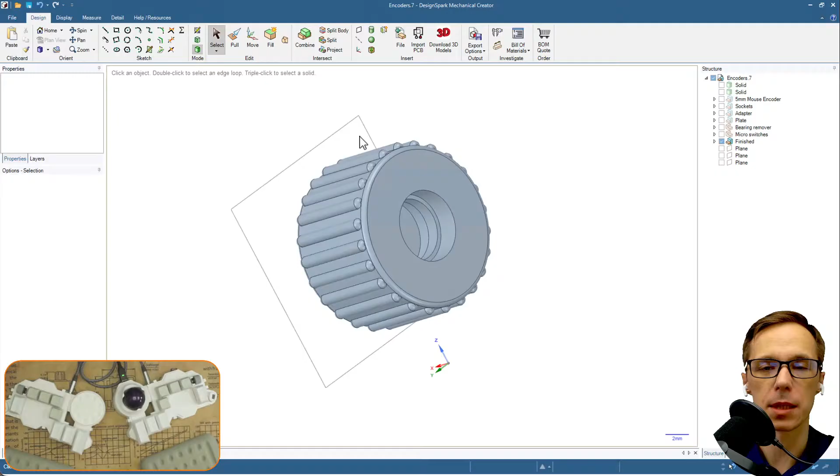I would like to take one more look at the USB-C sockets that we just put down recently, maybe there's a better way to attach it. Maybe we can get a mini jack somehow there, because as I said, I would rather have mini jack than USB-C, mainly because mini jacks, or TRRS cables, or TRS cables, I think they're easier to buy in lengths like 30 cm or something like that. But on top of that, they are more flexible than USB-C, so I would rather have that. But yeah, as I said, it's gonna be difficult to print the top plate. But then I had one more idea how to maybe figure that out, because what is actually limiting us in printing this - give me a sec, let's go back to our project.

So many versions already. So far the only thing getting in the way is this, our infrared. But I was thinking, what would happen if we make these detachable, something like we have with our MEH encoder, MEH01. Because I was looking at it - where is the top, okay, infrared, right. It might be possible to make something like a cutout over here, and then a tiny piece sticking out on it, so we can just clip them in, and this way we still will be able to print the top plate facing down. And that might be nice too, because if you print it facing down, usually the texture is a little bit nicer than the finish you get from the printer. You'd have to maybe do some ironing to get a good top surface, but if you print it face down, usually it's better.

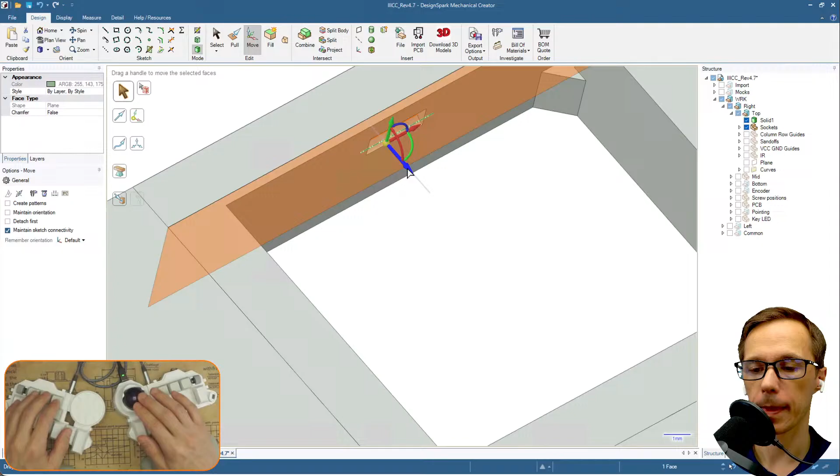Something like this, cut out like this. Oh, okay, good that I looked over here, because if we'd left it like that, it wouldn't fit, because there's a wall over there which I was too lazy to move. We can fix it right now, just a tiny bit. Oh no, nothing moved, okay, that's odd. Oh, come on. Okay, I get it now. Alright, so we have to remove the whole wall. Ah yes, this way, because the socket is actually all the way till the edge. That's okay. Anything over here? Alright, similar situation, and probably - oh yeah, I see, how could I have missed that? That was close one, and then you print the whole plate and you end up with nothing.

Okay, now we have a crap happening over here. Okay, can we fix it already? Somehow, okay, without breaking the whole model. Oh, come on, move. Okay, let's fill this one. Okay, I can't do that, so maybe... okay, that's gonna be tricky.

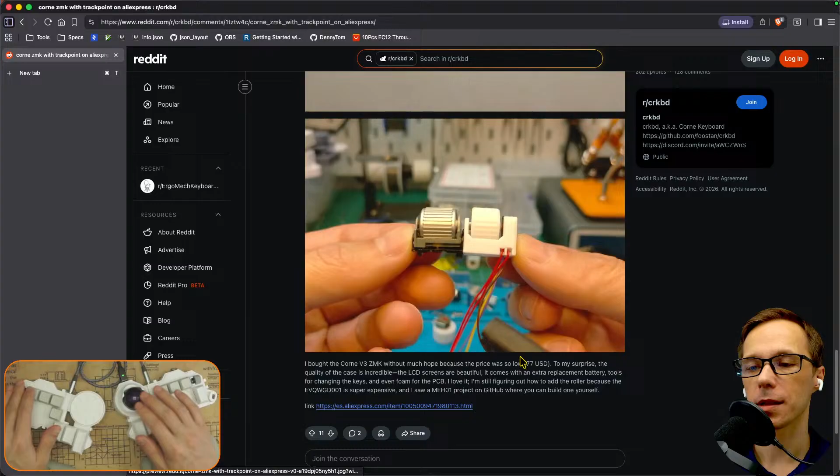I wanted to do something completely different, because today I've noticed, while browsing Reddit, I think it was on ErgoMech, let's take a look over here. Okay, let's do a new one. Someone was posting - yeah, this one, that's the article. As I was looking at that, really nice corne, cool, everything is cool. And then I saw this one, which is a photo from my GitHub, and apparently this person is trying to incorporate my encoder inside this corne. But the issue is I haven't made a proper adapter for it, I only have one that kind of fits my own footprint. But over here, as you can see, the footprint is a little bit different, it's like what originally was on this encoder. And if you'll be able to tell, those wires kind of get in the way.

Yeah, so that was a very weird design. I haven't done anything to make it fit, which is a little bit unfortunate. So that's what we're gonna try to do today. The first thing, I hope it won't take too long, as everything shouldn't take long, like 3 streams.

But yeah, as you can see, I really wanted to do it first, but now I have to go and fix this socket. Oh my god, why is it so messed up?

Alrighty. So I can't move this one. The socket is all the way here. Okay, I think I know what would happen if I take the top plate and cut just the socket.

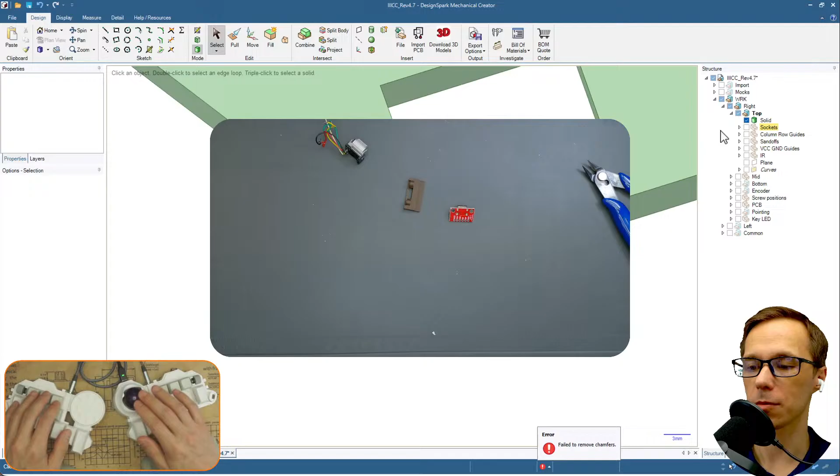Okay, that is not an issue because we're gonna be printing with the socket anyway. Yeah, perfect. Okay, save, so I don't lose it again.

Just like last time. How about this one? Okay, this one is okay. Just to be sure, let's do a quick check on the left side while we are still at it. Okay, top. Okay, I have everything here, maybe even more than I need. I don't need all this stuff.

Okay, there's no encoder here. I forgot. Okay, so we're gonna leave it for now. We'll come back. We're gonna try changing this infrared to make it clip in. I have the printer ready, so we can print in the meantime. I forgot to hide the view. So yeah, we're gonna fix that.

But first things first, let's try to do something with this encoder. So we have an adapter over here.

Okay, what is that? I have absolutely no idea. Where is it even coming from? Locate in structure, where is it? Okay, over here, it's part of the footprint. Oh, that's odd, what kind of...

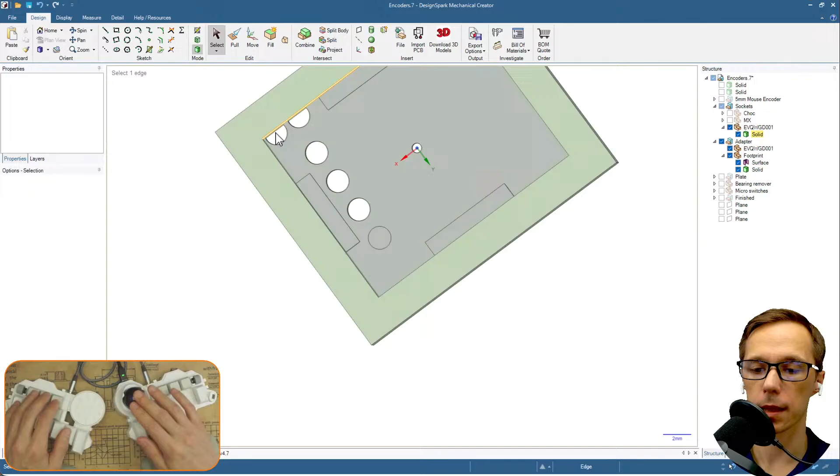I wonder if I have the original socket somewhere. Oh yes, over here. Okay, so that's the original one. Alright, so I still have the same layout for the pins. That is great, so that shouldn't be an issue to connect.

Okay, and I have cutouts over here, but the question is... Okay, that's not the full thing. I think I have one more project somewhere that is like a good representation of that.

I mean, I think I had this full encoder model somewhere. Okay, it's not here.

Switches. So that's one. Yeah, I was pretty much sure I have it somewhere. But I'm sure I have this, yeah, maybe, damn it.

Okay, because this is not the correct socket. But I had a footprint somewhere. Yeah, we are missing the cutout. So that's not the full thing. Oh boy.

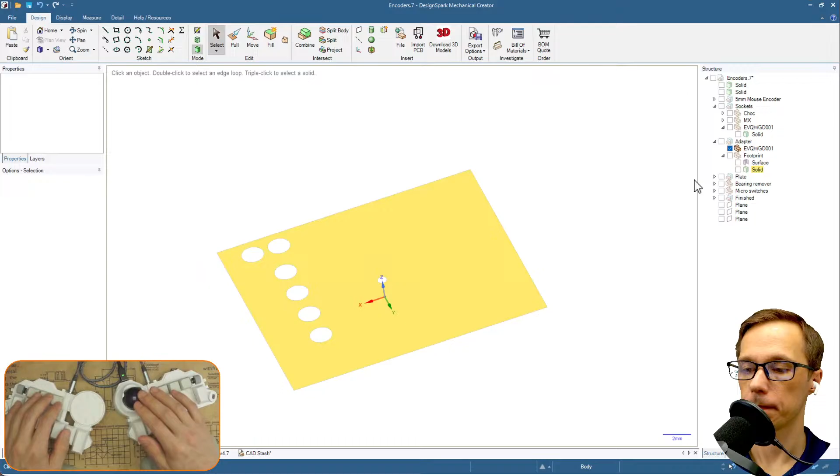If we go back over here, okay, so this is my socket for the PCB, but something is missing over here. Okay, that looks odd. Yeah, these were supposed to be hooks, but they are not. Interesting.

Okay, let's take a look over here, because I think... come on, show up. Let's take a look. Oh yeah, okay. There are hooks over here, but I'm missing them, and I think I know what's wrong.

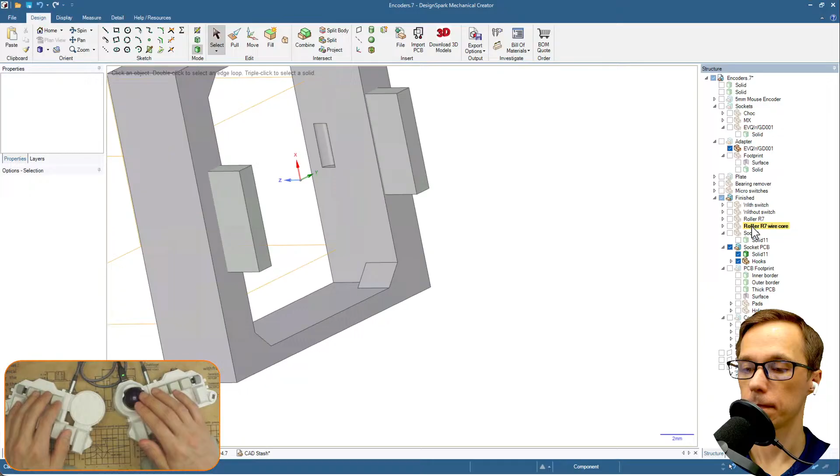And there's one part missing here. Where the hell did it go? Yeah, it's nowhere to be found. Maybe I opened the wrong one?

Okay, it's number 7, so it's the newest one. Okay, I think they're over here, these two. How did they get there? I have absolutely no idea. But I hope that was the one.

Yes, correct, right, perfect. Okay, so this is how my socket looks like, and I have a footprint for it and everything. But what we are missing is a footprint that would fit this encoder, the original one, that was actually meant to replace.

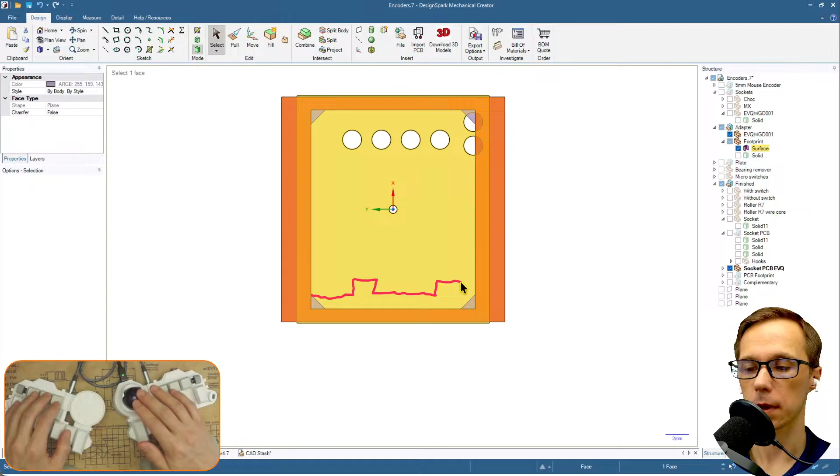So we have to model something over here, because the bottom part looks more or less like this. It goes like this, something over here, something over here. So that's the mounting mechanism. It's kind of weird, to be honest. I think it was meant to be sliding to the side, because the depth here was 1.6. Basically, this is what we have - thickness of a PCB.

Okay, 2 millimeters, and I have no idea how thick this one is. It's either 1.4 or 1.6. Difficult to measure.

So I think what we would like to do... okay, I think the light is going crazy on my face. What is happening today? As usual, it's never okay.

I think we can do it. Okay, so that is the top. So from the bottom, I'm thinking we could maybe go like this, print a leg over here, and something like this, two pieces like that. So they would kind of clip in over there.

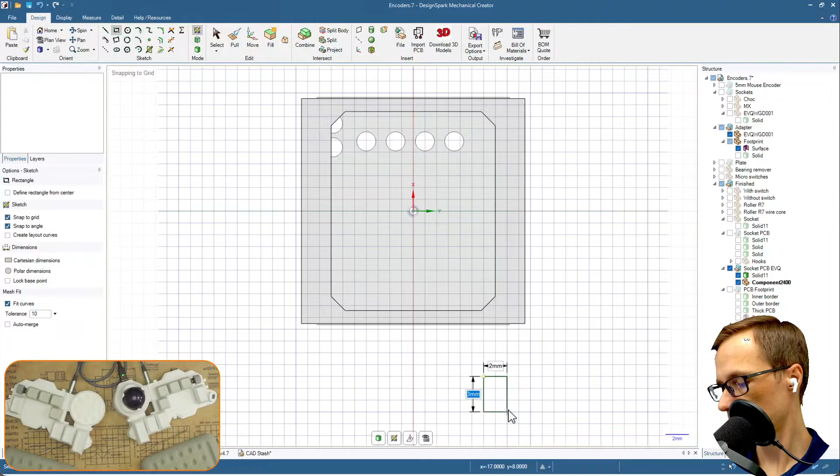Yes, we have to make a new model. Okay, let's do a rectangle. So it's gonna be 2 by 0.3. Okay, 2.3. No, that one was supposed to be 2.

So the distance over here needs to be 5. Basically, we can add this to the footprint maybe.

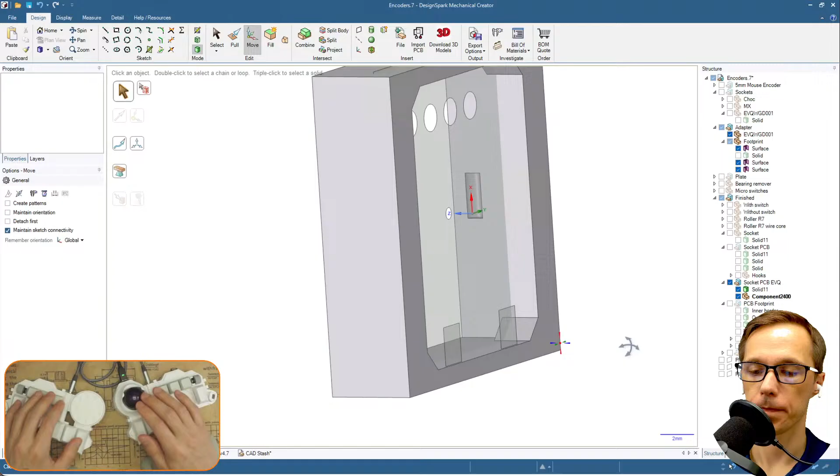Yeah, it would have been much easier if I had this PCB with me, then I could see it. There is 1.3 over here.

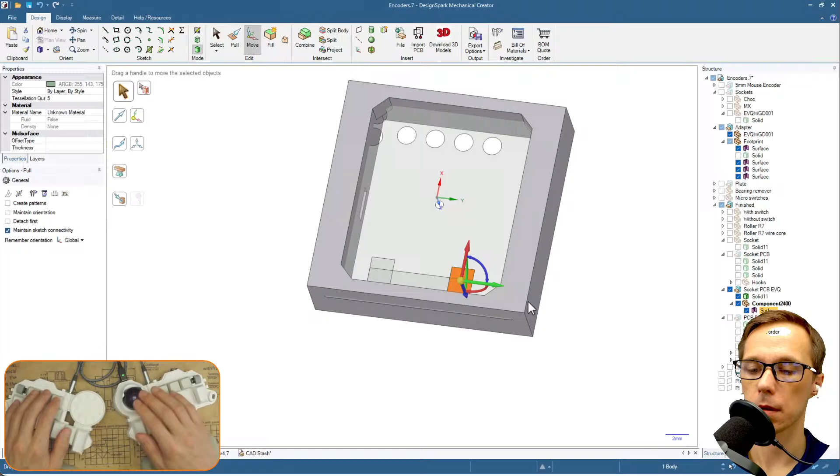Copy this and paste. It's a little bit too big. I would say maybe, I don't know, let's do 1.8 for now. Well, that is not that much.

Okay, give me a second, guys. Okay, so we have to attach this part somehow to the edge.

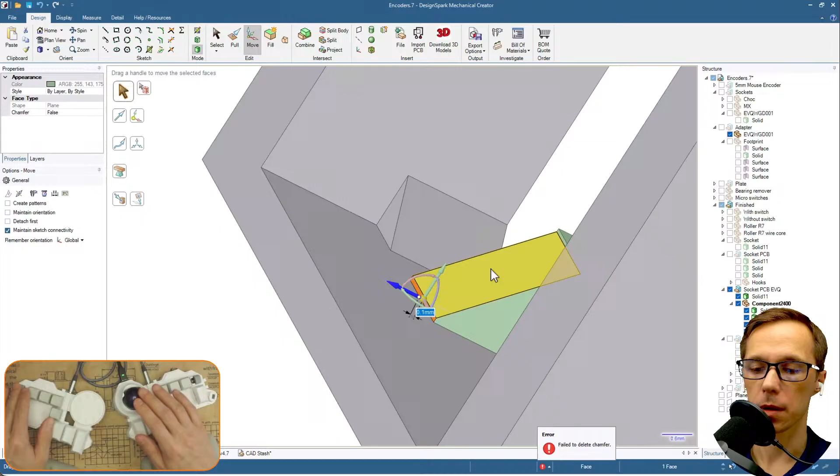Okay, so this one we can print it on this side. There's no problem, these parts will print okay. This is so tiny that we don't need a support or anything like that.

And we're gonna be needing it to print like this. Okay, so supposedly this should fit into this. Okay, maybe I think I made a tiny mistake.

Maybe we should make it a little bit smaller, like 0.1 smaller on each side.

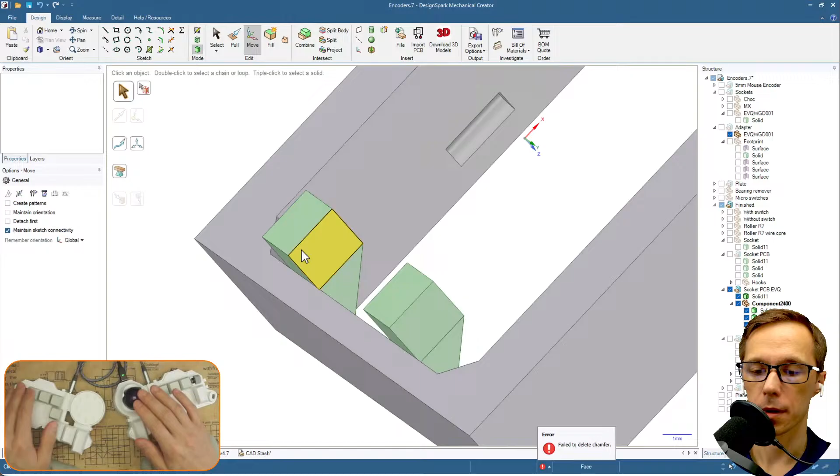I hope it will hold. Okay, on this side maybe as well, minus 0.1.

Okay, what is the standard PCB thickness? I think it's 1.6, right? JLC PCB.

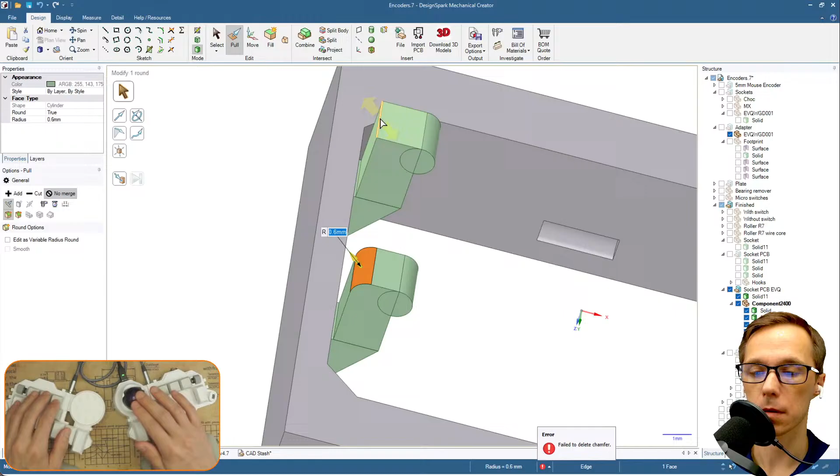Maybe we can make this, how about like a round edge, maybe 0.6. Would that do anything? Okay, like so.

Yes, but there is one more thing over there, I forgot. This one. There is a hole over here. And there is this tiny, I don't know what that even is, tiny nipple.

Oh, come on, focus. Too close. Over here on my thumb.

It's 150, but I don't have it anywhere, on my footprint, for example. Yeah, it's not. Okay, that might be problematic. Where is it actually? Okay, it looks like it's on the edge. It should be somewhere over here.

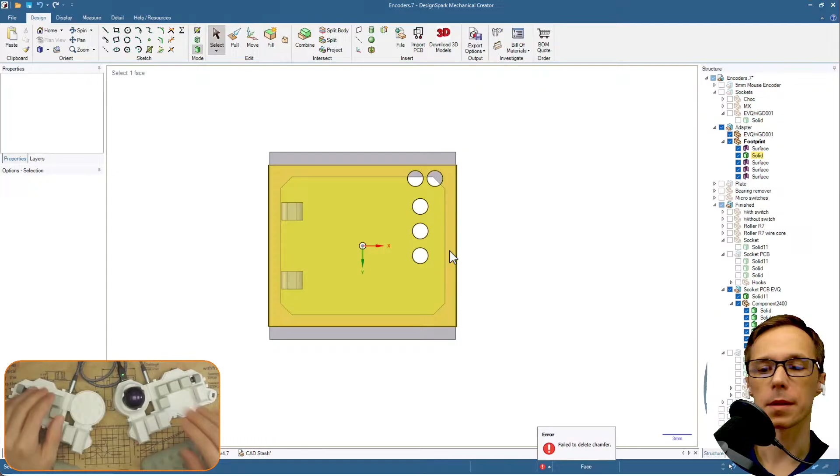And my green screen is breaking up again. Oh my god, what a stream. Am I gonna have at least one stream that everything works, no issues?

What is the size of this thing? 1.5 already. Yes, 1.5. Okay, let's drop it.

Okay, hello, WMW. Okay, how hard would it be to replace TRS jack on a Ferris sweep with that common JST connector for batteries?

Well, I'm not quite familiar with how Ferris is built. You're talking about Ferris sweep, right? But if it's a TRRS, okay, I don't think you can swap the footprint from.

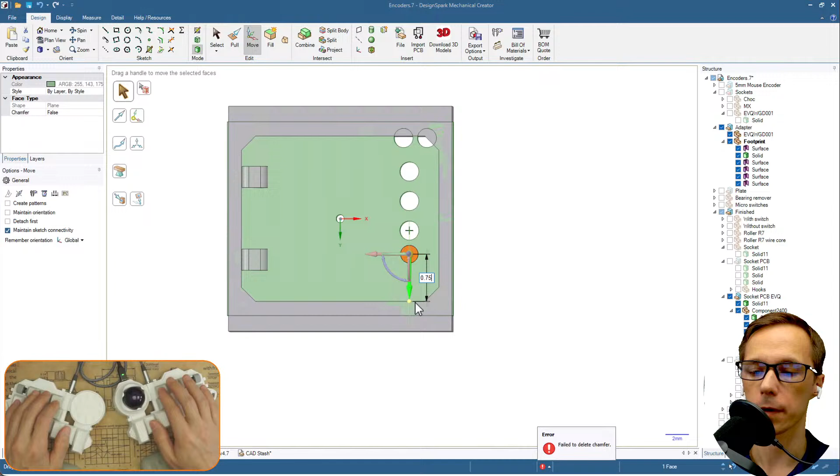Oh, no worries, this flow is always a mess, so no worries about that.

Okay, so there's one more hole over here. Okay, do I really need it? Probably not. Yeah, okay, it's not needed. I kind of lost my train of thought, because we don't really need this opening, because all we need is to clip in the socket and that will be it.

And that should work. Okay, I'm gonna print this one, and we can take a look how fragile this part is. I just swapped PLA to PETG, so it should be a little bit more resistant, so maybe it won't break that easily.

I wonder if I really need this bevel over here. Yes, I need it, because otherwise I won't be able to print this thing. Okay, that's fine, let's leave it as is. Anything else I need to add? No, I think that's all.

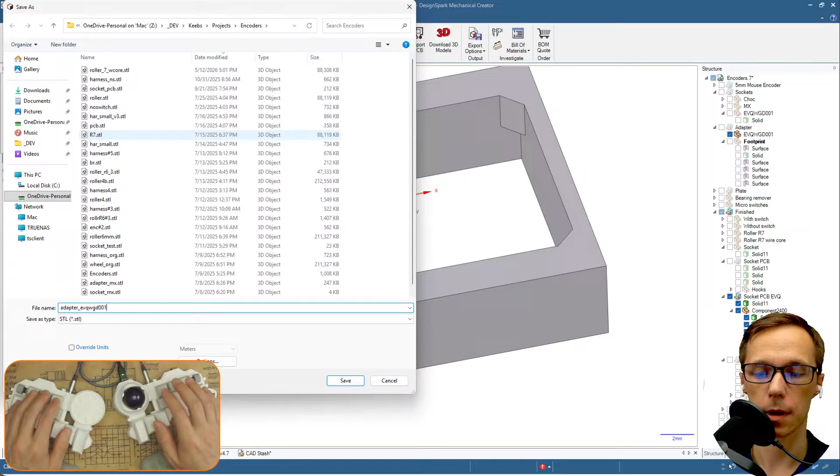No, not PDF, oh my god. STL. Okay, it's gonna be adapter. Okay, I'm gonna... EVQWGD001. Let's give it one more try.

Okay, flip it over, so this should print like this. Okay, something is slowing down. Okay, maybe my Mac is not doing well.

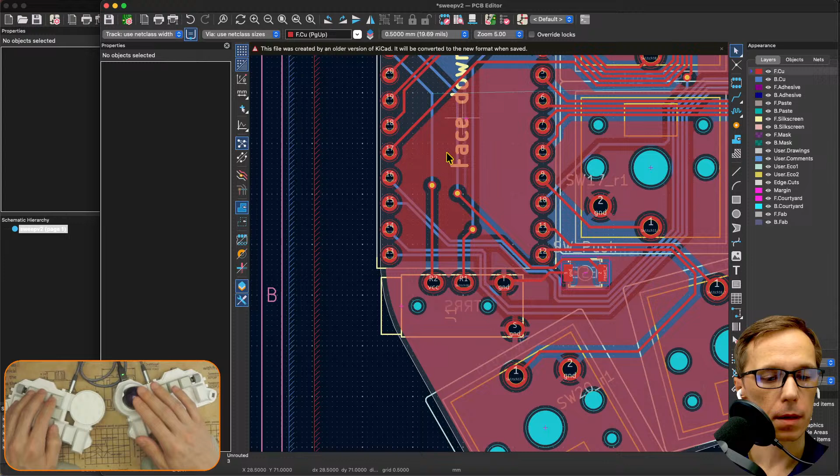Yeah, I think it should be possible. It should be possible to change. Well, yeah, you're right, there is plenty of space over there, so definitely something you can do.

Yeah, that shouldn't be difficult. You just need to remove this jack from the schematic, remove these mounting holes over here instead of mounting holes. Okay, where's delete?

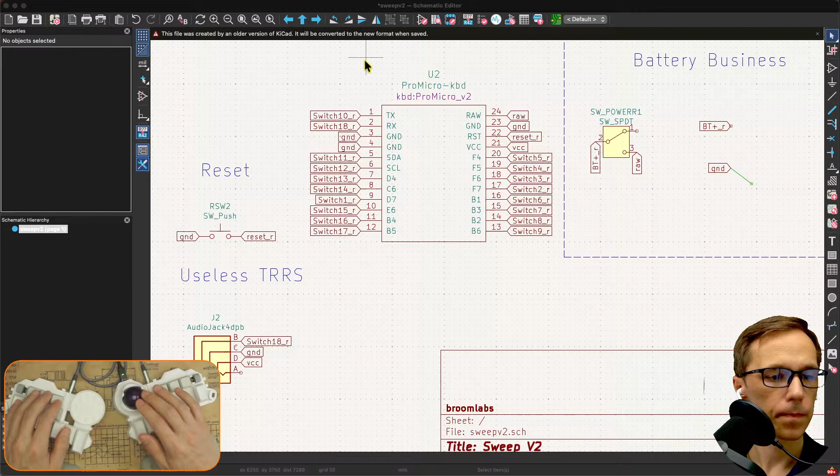I already forgot how to add something. Just gonna... I don't know how to find JST over here. If I even have a footprint, probably not. I don't know if it's by default, because there are different connectors over here.

So yeah, you probably will have to find as well a footprint for this JST. But yeah, looking at it, it should be quite easy to do, as I said, you just remove... yeah, definitely should be easy to do even, I would say, because you just remove this, instead of these holes over here, you're just gonna drop this JST, connect whichever pin you need, update the PCB, and on the PCB you will just have to place it where you have enough space, and that's it.

Looking at it, this one is a little bit different, because on the one that I saw on the store, this push button was over here, but on this one it's here, but that's not a problem.

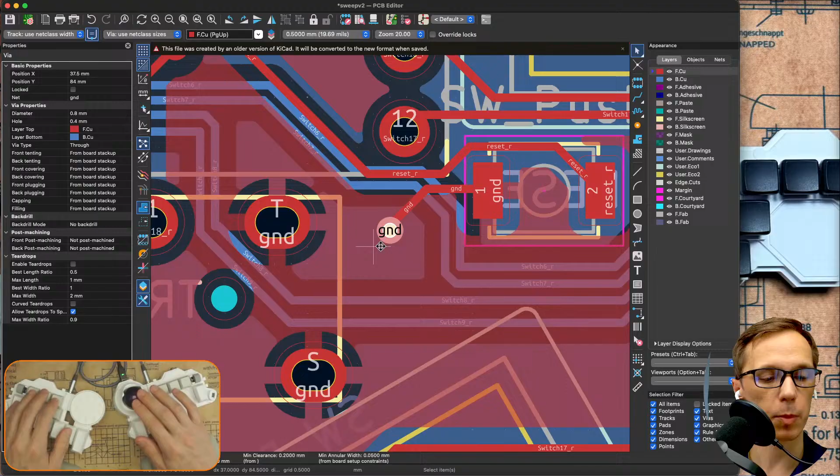Okay, so instead of having it like this, you can just drop a via. Where is the via on this thing? Is this a via? Yes, you just drop it here and you see it's already ground, because the bottom plate is ground, so you have to do it like this.

So basically, the switch, you don't have to move it or remove it or do much with it. You just need to disconnect from here, because you're gonna remove this anyway. It's gonna be something like this, right? You're gonna have a JST over here, and this ground, you just connect, drop a via, and that should be it.

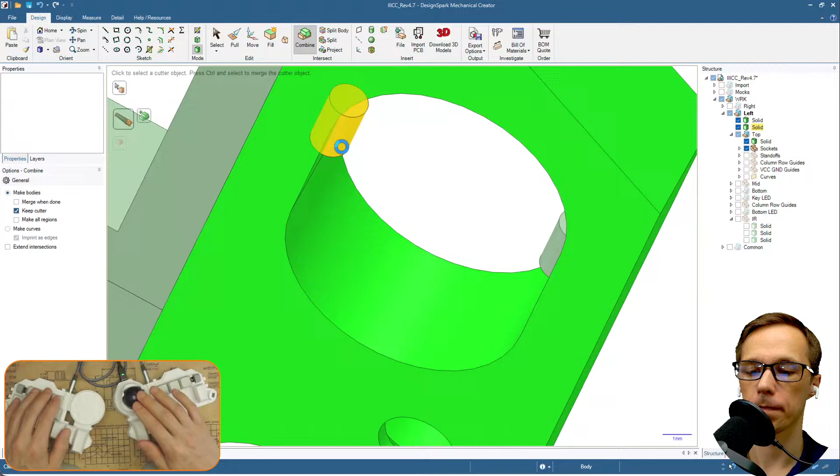Okay, maybe we can try with just one thing first. I mean, I don't have to do both at the same time. Can I now change it to what was that, 0.6? And we can bring back. Okay, what is this part? Okay, it's the other one.

Okay, so that will be our infrared. We're gonna slot it from the top. I think we should maybe make it a little bit smaller. We should leave it, well, we should give it some more space, I assume, this bottom part.

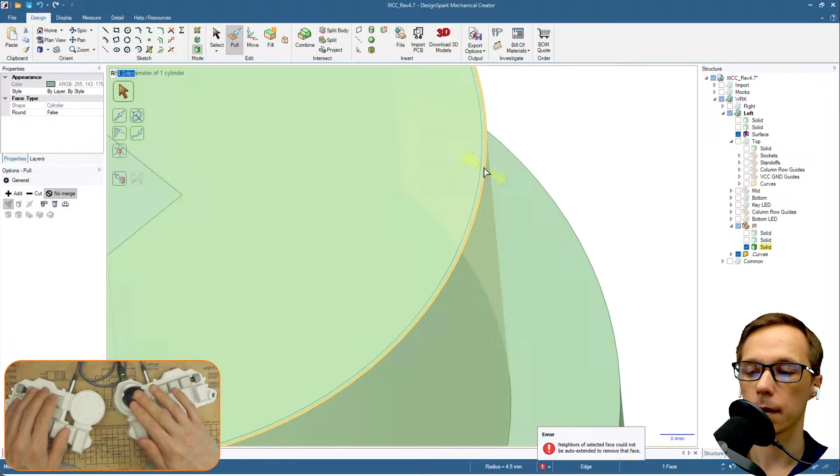Let's do an offset maybe, like 0.005. Okay, not how I wanted it.

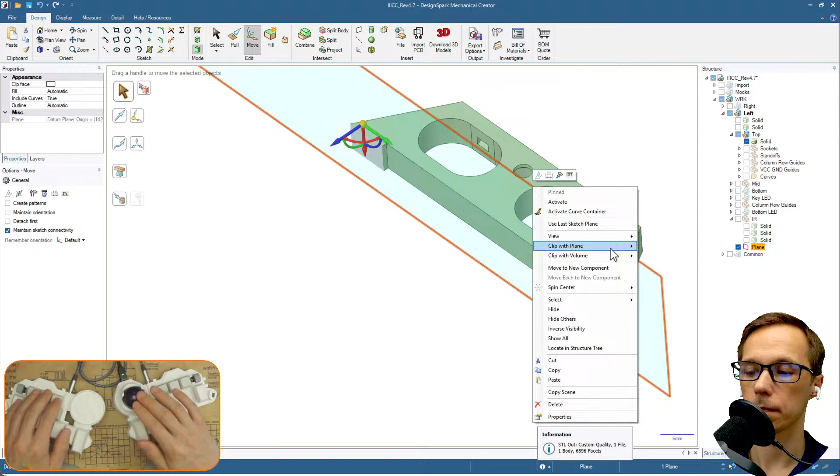Okay, I hope I can clip this with the plane. Can I? Okay, perfect. One more thing, we don't need the whole piece, I am just interested in this part. So let's clip it further. Why is it so long? Okay, I guess half of this part should be okay.

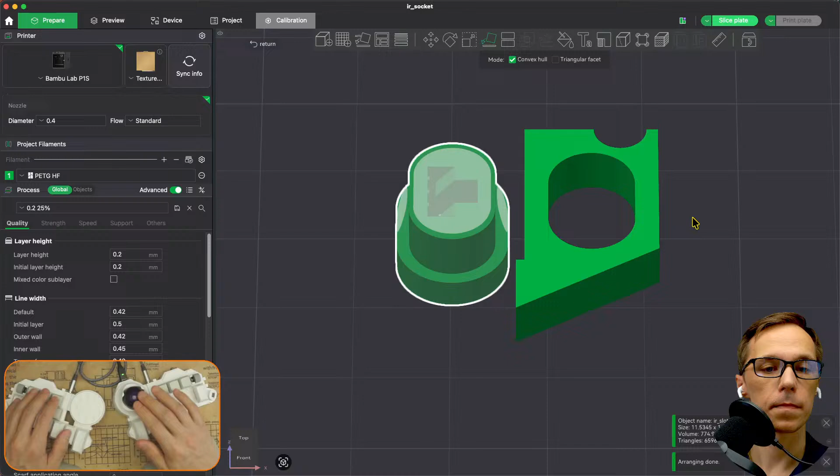I know what happened with this. Why is it so slow now? Okay, the question is how should we print the infrared. Should it be like this, or should it be the other way around? Well, the issue is that this edge might not print that well. Probably it won't.

Okay, it's 1.3 millimeters, so not good, not good. And I'm pretty much sure we're gonna be needing some kind of support over here. This might make fitting the infrared difficult if we do it like this. But we have no choice.

Let's print it and see how it looks. Oh, why is it so slow? My god, it runs terrible. Are there any settings? Never mind. Okay, I need to change the filament. Okay, I will just leave it. Let's do it in PETG. Right, let's go.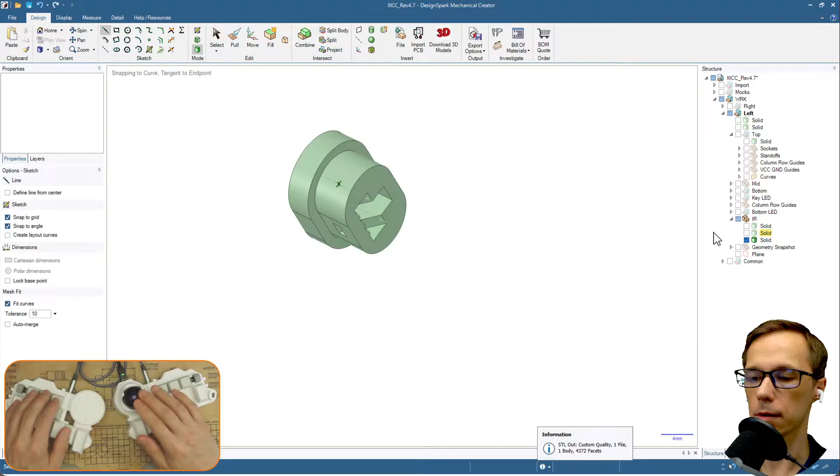Okay, there it goes. Let's take a look, what else do we have over here? This geometry we can get rid of.

Okay, my cutters, I'm gonna leave them for now. Okay, that's the left side. Oh, doesn't matter.

Okay, I wanted to take a look, one more look at our middle plate or mid plate. So this one is like from the bottom.

I was thinking maybe moving this one all the way up so that the socket, the USB-C socket, would be attached to the top plate, but that will be difficult to pull off.

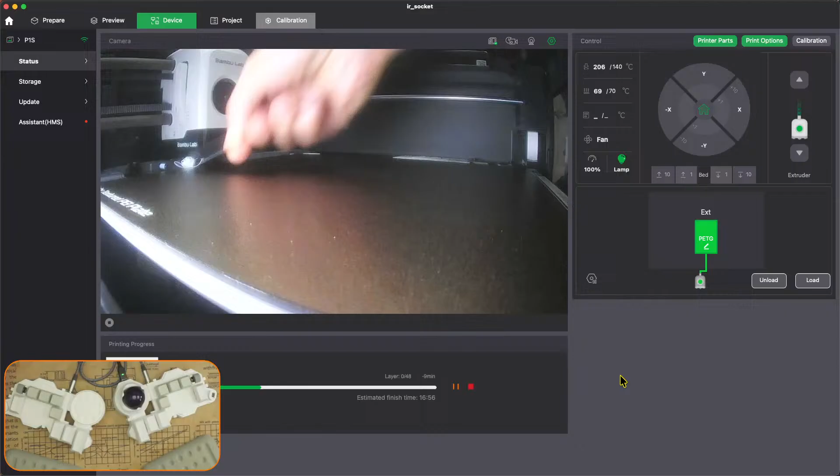Quite often it happens that some part of the plastic gets stuck to it. Instead of going down the chute, it will somehow stay attached to the nozzle.

It looks like it's okay. I don't know what happened with the camera, there is no view. Oh, we have, there's a view. I think that's like the 6th time I'm trying to make it work. Finally it triggered. Alright, so we can admire.

Yeah, I have like all the bottom plate prepared for hand wiring, but some of the stuff is not gonna be used. So this is the opening for the I2C expander.

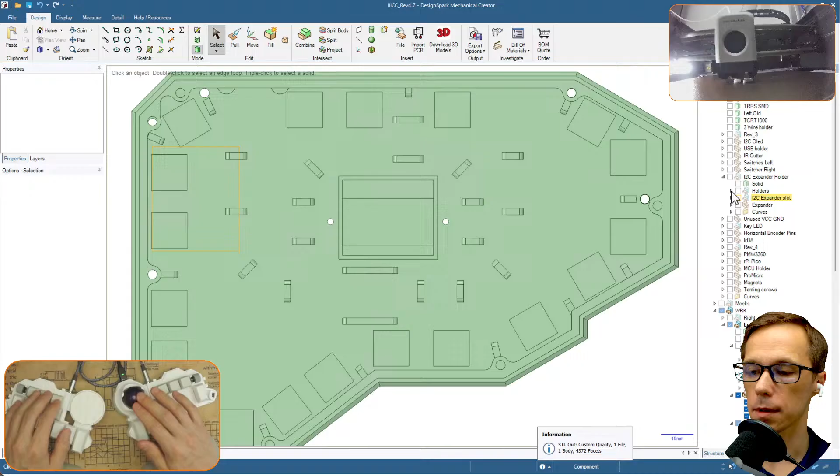Okay, the holder is over here. I even have a slot, quite a lot of things. Left side, yeah, looks like this. Okay, I think we can stay with that.

Then we can basically use even something as small as Arduino Xiao, like the very, very small one, because we don't really need that many connections to it. Like what we need, I guess we only need...

Let's take a look, how does it look like? Seeed Xiao, like this. Oh, it's over here.

What do we have? Okay, SDA, SCL. So we're gonna be needing these two for I2C, and we have like clock.

So these 4. Okay, this one is RX, and TX is here. Okay, this color is SPI, so it's only these 3 for SPI.

So we're gonna be needing one more. So this one we can change to chip select. So that's 4, right? Chip select, master in, master out, clock.

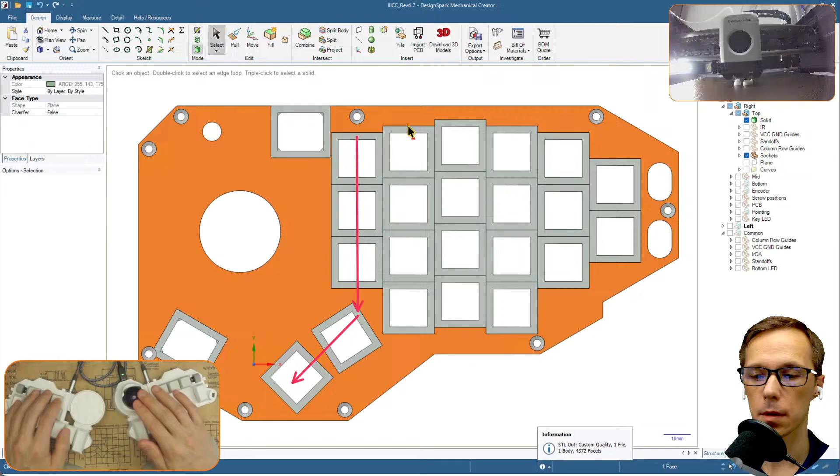Let's do columns first. So that would be one column. Another one over here.

Okay, we need infrared hooked up somehow as well. What else do we have?

Okay, one for the encoder over here, and we have another encoder, so that's 1, 2, 3, 4, 5, 6, 7, 8, 9. But basically we can make it smaller.

Maybe... ah, damn it. For example, let's change color. Let's do rows, so that will be one row.

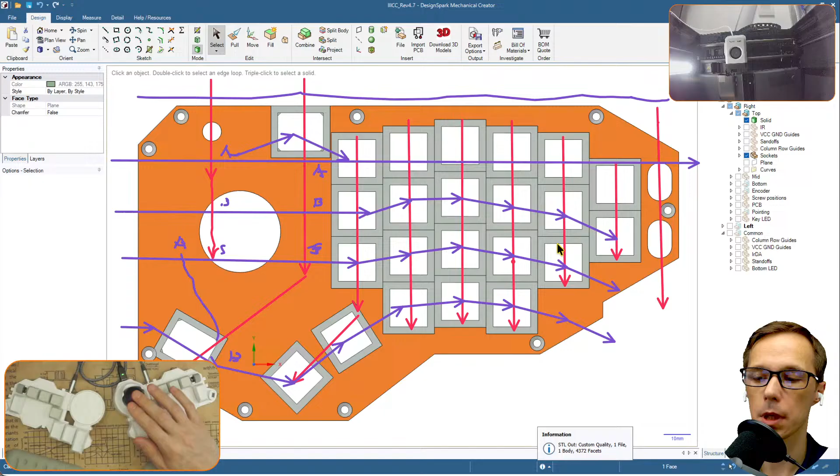This one will also eat too, because there will be A, B, and switch from this one. Yeah, okay, let's leave it like this. So we have 5 rows, and okay, this column over here, we can also kind of get rid of it maybe, and we can use this one. So this column will kind of wrap around and go through here, because we have - this is like one row, second, third and fourth. So these we can route like this. Yeah, so this way we can save on this column. We're gonna use this one, wrap it around. So that will be one.

I'm trying to save this beautiful picture, and I have no idea what is happening. I can't press anything. Oh boy.

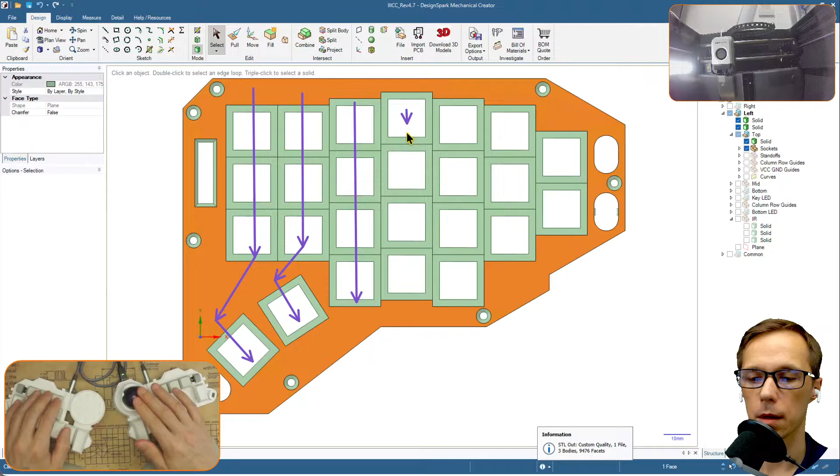Okay, here we have 3. And over here I think we can wrap it like this. We can save some wire maybe.

No, hold on a second. Oh, it's not gonna work. Okay, this one is wrong. Can't be like this. Okay, one more.

And this one has to go all the way to here, right? And this one... Now we have a problem because we have one infrared over here.

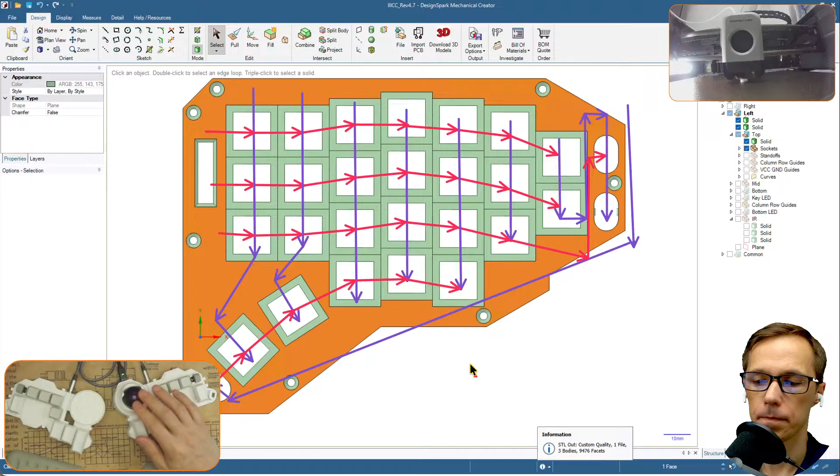Not so good. So we'll have it like this. 1, 2, and this column will go all the way. On one hand it would be nice because we would have one column just for the infrared. Good separation. We don't have an encoder over here or anything like that. So it's, I guess, okay.

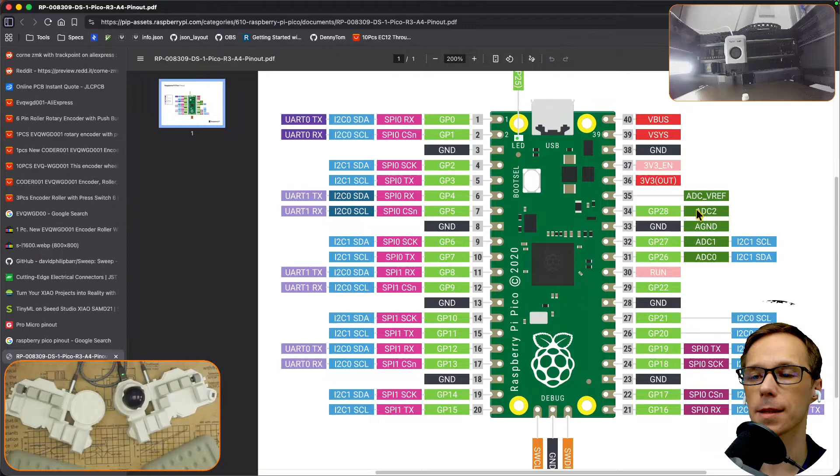How many do we have over here? 1, 2, 3, 4, 5, 6, 10, 14, 16, oh my god, 18, 22, 3, 4, 5, 6, wow, 26. Oh, that's plenty. So we can have our SPI, we can have I2C, we can have everything on this one.

Do we have space for that? Let's just take a look. I wonder if I have a Pico over here. Oh, okay, there is. Oh wow, looks like it was planned like that at some point. So it kind of fits. Or maybe not so much, because...

Okay, we're not gonna be using an I2C expander then. Oh.

Okay, so it's not that bad, but the problem is that it's basically covering 2 keys, almost 2.5. Or technically 2.5 switches will be covered by it. And if I would like to have diodes over here on the bottom, if I would like to have a per key RGB, then this will give us some issues.

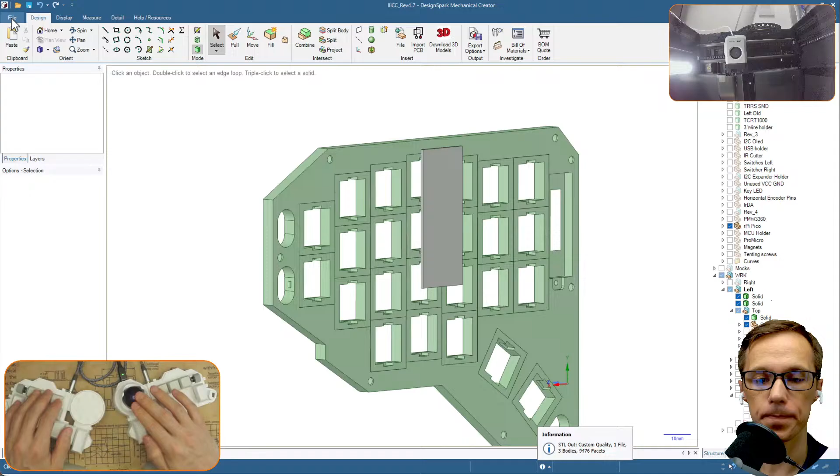And the Xiao would be much smaller. And do I have it over here as well? Nope. But we can import it quickly. Yeah, there it is.

No, it's less than half. Well, it will still cover one switch, so not ideal. But what we can do, we can maybe... For this one we could move it maybe... Yeah, but with this one we still need to use an I2C expander, and then it's still gonna be not enough space on the bottom.

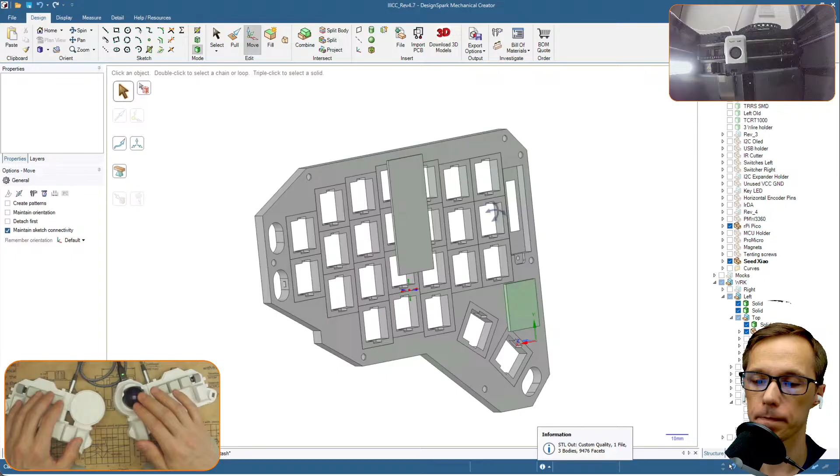Okay, one more thing that we can do, maybe we can bury it under the bottom plate. So if we had bottom...

It's 2.4. Well, basically we could move it all the way, for example, from the bottom could be 0.6. That is enough.

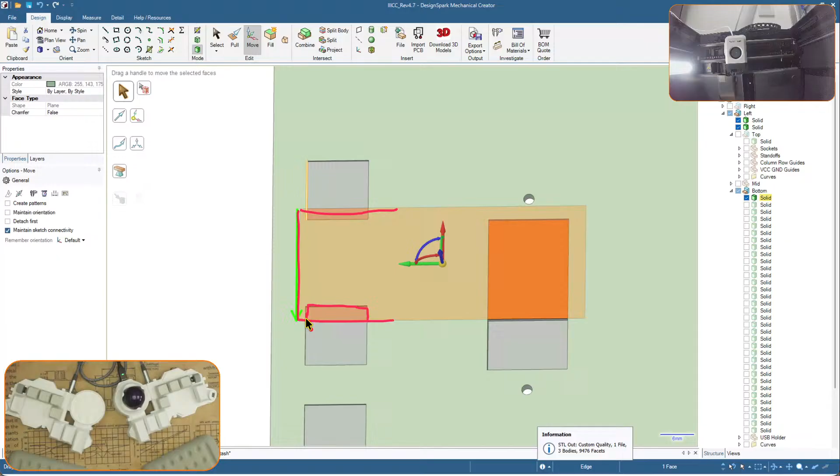I'm gonna go and pick up the stuff that just finished printing, and I need a few more minutes because I think I have diodes somewhere over there as well, so we can take a look at the diodes as well.

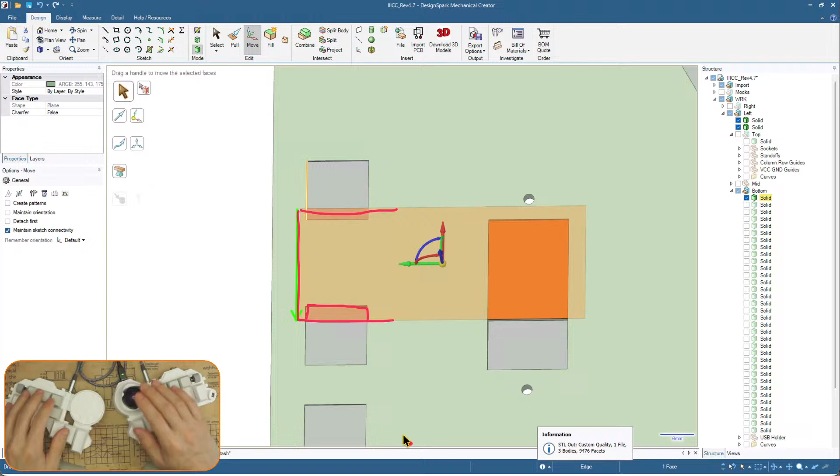What is the size of this thing? 10 by... okay, almost like 10.5 by 10.5. Alrighty, I guess it would seem like I have these. Yes, 11 by 11, so I put them everywhere.

I was also working at some point on this thing. Okay, let's put up. Because in terms of per key RGB or like per key lighting, I came up with this idea that we can do something. Okay, 1, 2, there should be more of these.

Maybe I didn't finish this side. But there should be a key LED. Yeah, something like this. So the idea was that...

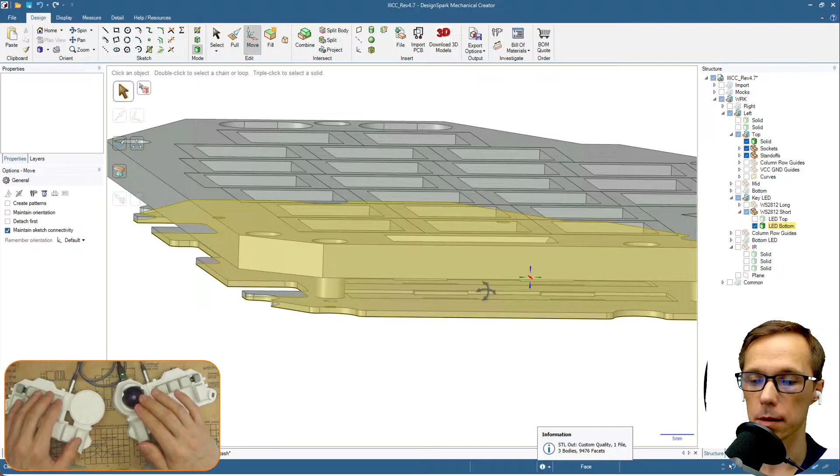I think I had a few columns over here already, but standoffs, is that it? Yeah, so I have a standoff here. Well, for some reason this one is a little bit lower than it should be. Yeah, but it would be something like this.

Okay, let's take a look at the bottom plate, because I am curious. Well, I think at some point I had it nailed down that there was enough space for everything. Yeah, exactly.

And I can still lift it up a little bit. I don't know why I put it like this. Okay, so maybe that is not such a bad idea. Instead of trying to put all the diodes on the bottom and having issue fitting everything together, we can do it like this. And I think it would be better if we... Yeah, difficult choice.

If I want to stick to I2C expander, because it's easier to program, it would be also very easy to swap later on if I would like to have a wireless version. It's just one MCU and just add battery and that's it, problem solved. And if we do it like for two, okay. Alright, I forgot that we can't have it like this because there's not enough space. I mean, we have not enough pins.

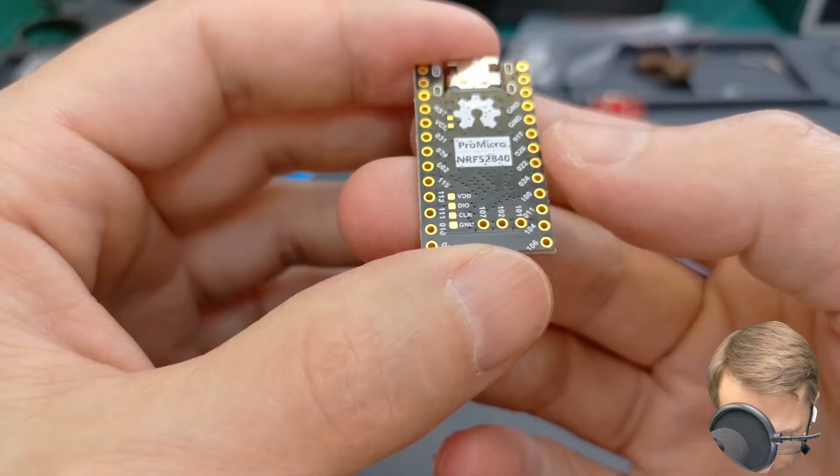How many pins? Okay, 1, 2. Yeah, I wonder if I have access to this as well. No way, this one is still 16, all of them. So it's the same pinout, just these 3 extra. That will give us 19. It's not even the same size as Pro Micro. This one is smaller.

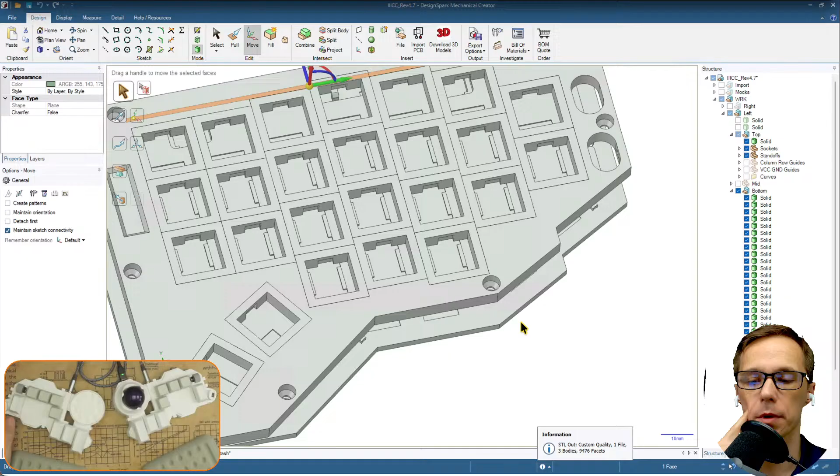Well, having 2 MCUs would be cool because then I could change and I could use 2 Arduinos, for example, because they are small. It would be easy to fit them in, and then I could have different color for keys. We can go with this plate and different color for underglow, so that would be this part.

Okay, but what we need to fix? We need to fix this diode, right? Because we just tested, looks kind of promising. And the issue is that I think this is too big. What is that? 0.6.

Let's go back over here. Okay, we did 0.5, look, that's not much difference, to be honest. I wonder if I'll be able to push it out. Probably not. Oh no, it came out. No way.

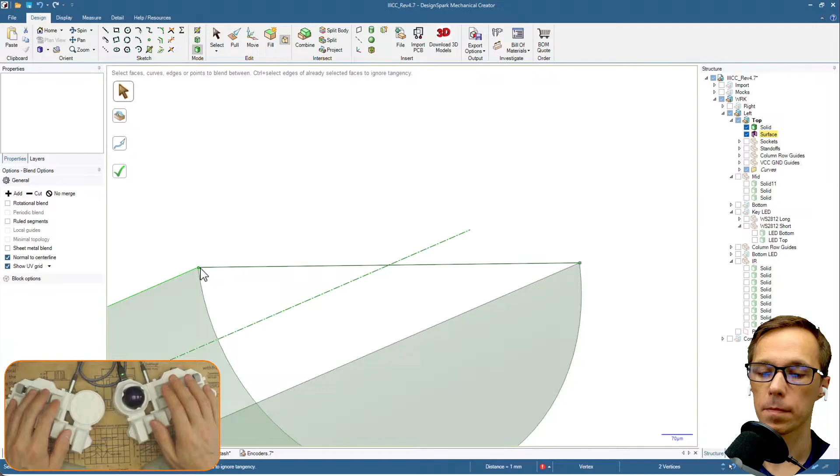Now I should be able to fill this. And this is how you can quickly build something just by using edges, you can blend them together. And then you end up with... probably it would be faster to just make a cylinder, maybe.

Okay, let's change this, it was supposed to be, okay, it's 0.5. 0.5 over here. We just have to cut.

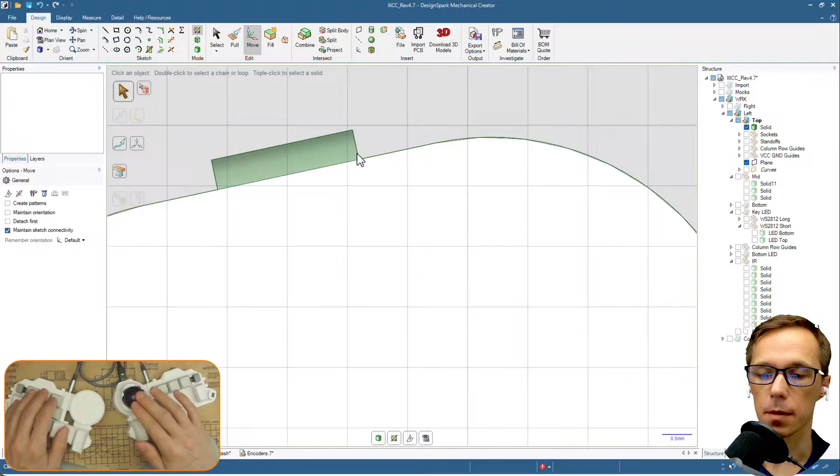Okay, looks like we are done. One more thing I would like to check is that if they are all on the same level, I can do that quickly just by dropping a plane and moving it to the midpoint over here, and then I can just try to draw. Yeah, they all look okay. Perfect.

Yeah, but that was what? Just the left side.

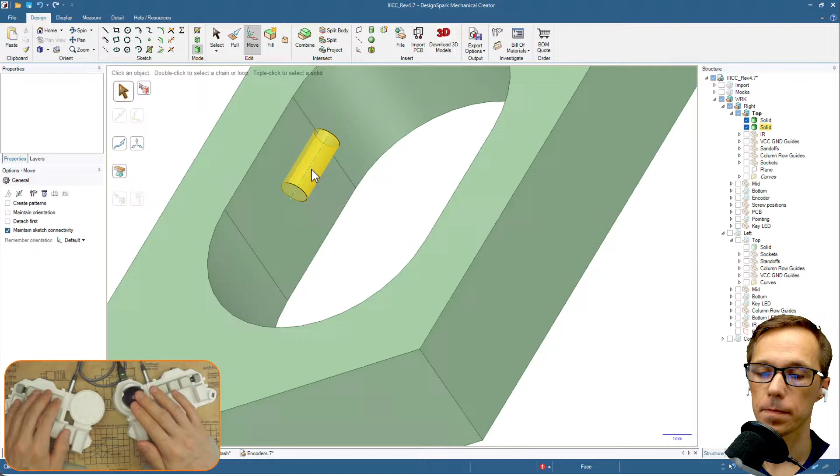A little less work on this side because we have only two diodes, two sensors.

And what we can do, okay, I still forgot I need to make it a little bit smaller. Okay, let's do it like this. Let's remove them, let's go back to the left side, because over there we have almost everything done.

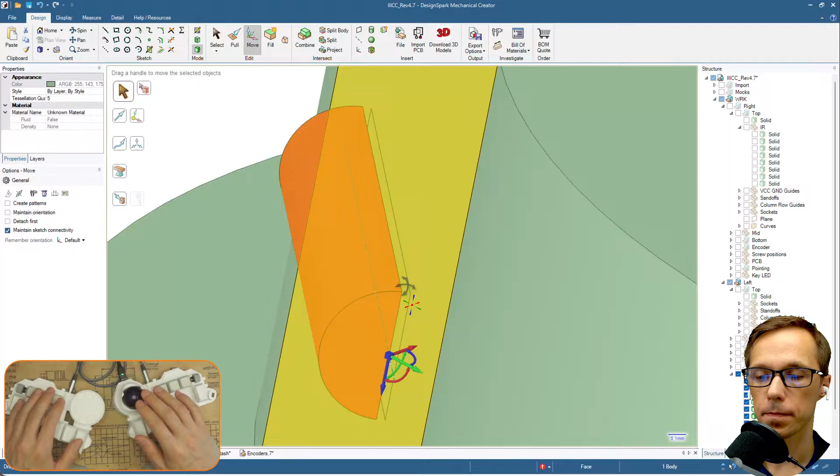Perfect. Okay, it should be good right now. What's this oddity here? All right. Always something.

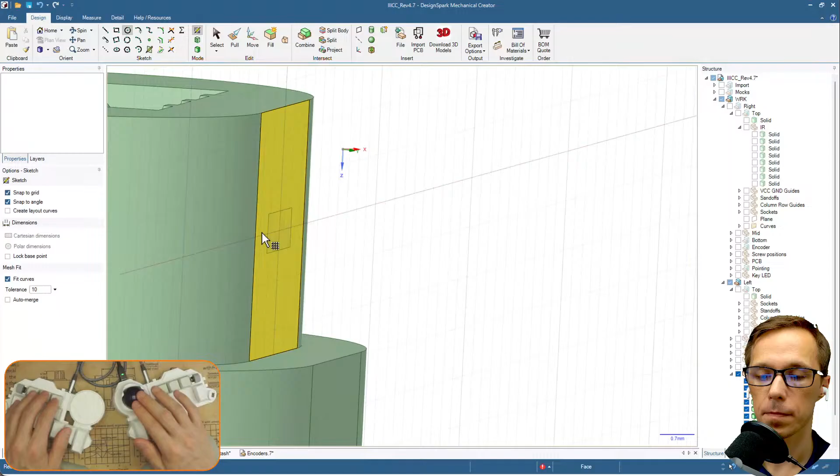Wait, I think I've made a mistake because this one will be smaller right now. I basically chopped off a little bit where I shouldn't. And we have to redo almost everything. That is odd.

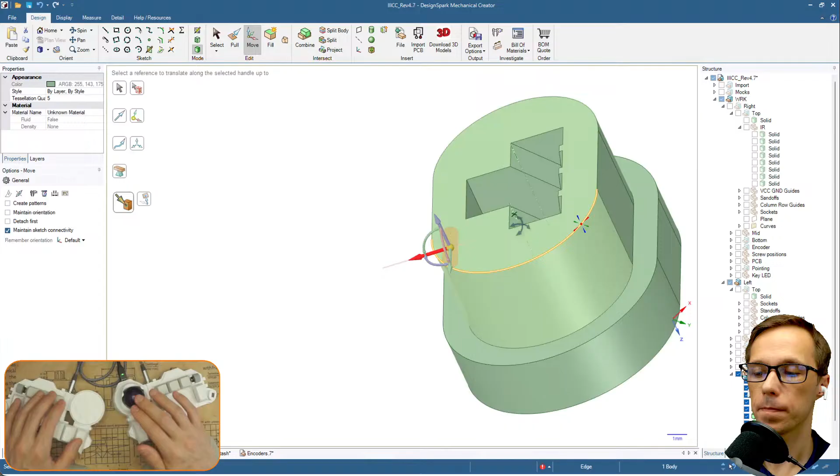Okay, finally, I think all of them should be okay right now. We have some margin over here, not much, but should be enough. Yeah, it's looking pretty good.

All right, I guess that's it for today. On the next one, oh my god, I don't even want to think about it. We have to go through the bottom plate and figure out all the connections. First of all, we'll have to change the size, because we changed the top and the mid plate, so we have to change the shape of the bottom one as well. But this one is not that difficult because we don't have any edges or anything like that we had with the mid plate, so that should go quite fast, I hope.

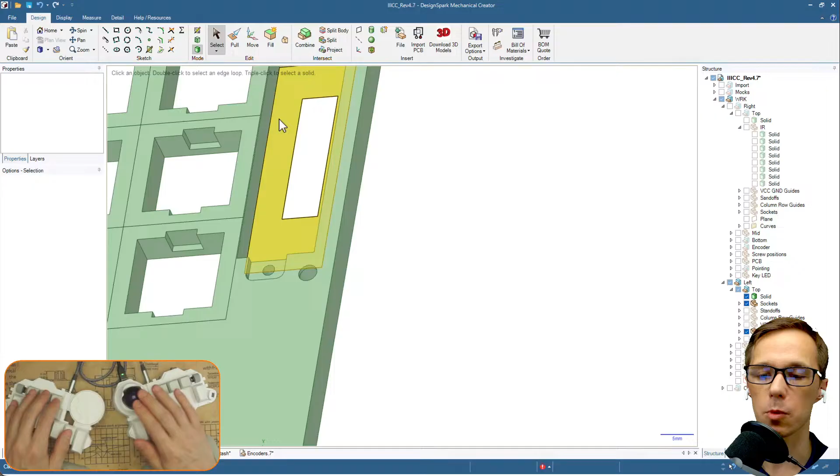I'm happy that I can have infrared sensors that I can detach, so this way I can print the whole plate upside down. That will also be good for the screen over here, because we're gonna have a clean edge. Otherwise it would have been the other way, with remains from the support, and the screen wouldn't sit as flush as it would printing face down. So this part will be super clean, and the screen will sit quite nicely, basically no space in between. I already printed that some time ago, so it looked okay. We're gonna leave it like that.

All right. Wasn't that bad today, nothing broke majorly, no big hiccups on the stream.